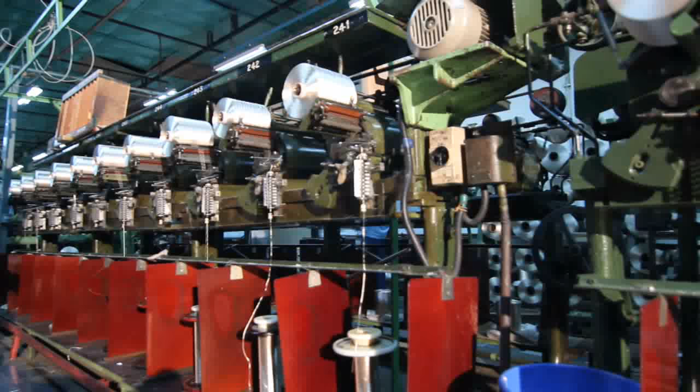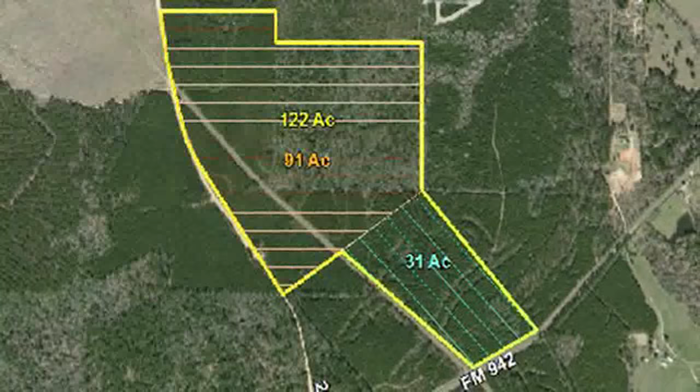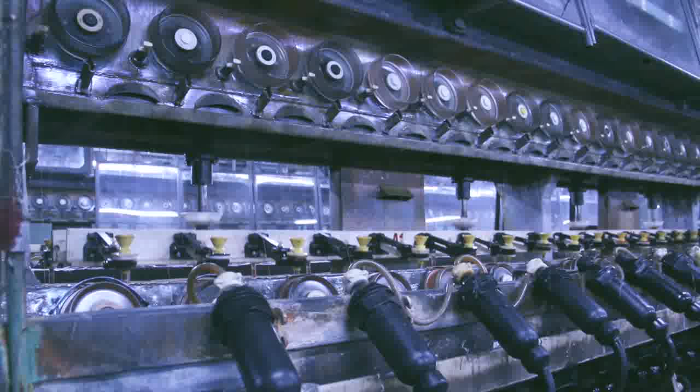It's Shri B.K. Birla. At a relatively young age of 27, in the year 1952, Shri Basant Kumar Birla, after having completed his studies, decided to venture into the viscose yarn making industry. He bought 122 acres of land in a remote, thickly forested area populated by tribals at a distance of 56 kilometers from Mumbai. In 4 years, with sheer hard work, determination and complete dedication, Basant Kumarji realized his dream, and in September 1956, the newly established Century Rayon plant commenced production of 5.5 tons per day of pot-spun viscose filament yarn. In the year 1963, the Tyre cord plant was initiated in collaboration with M/s AKU, Holland.

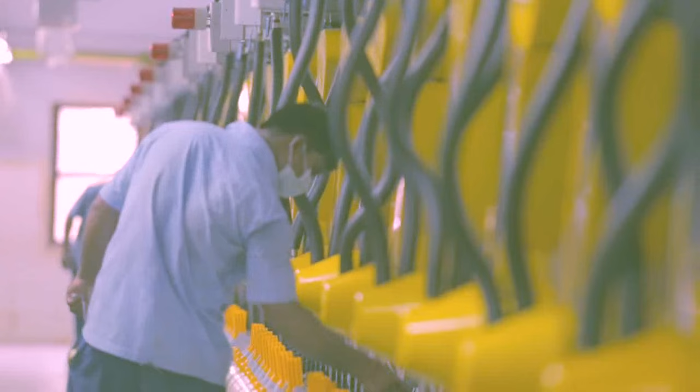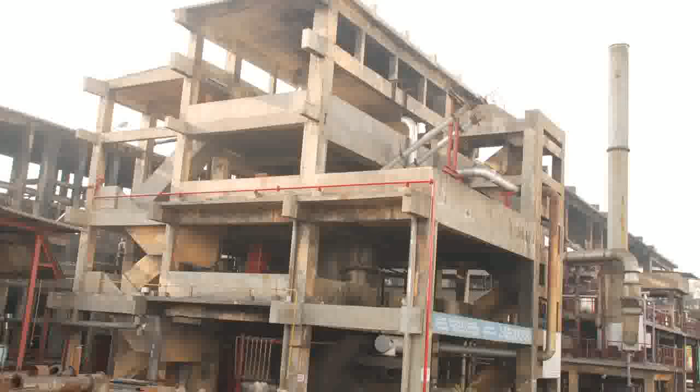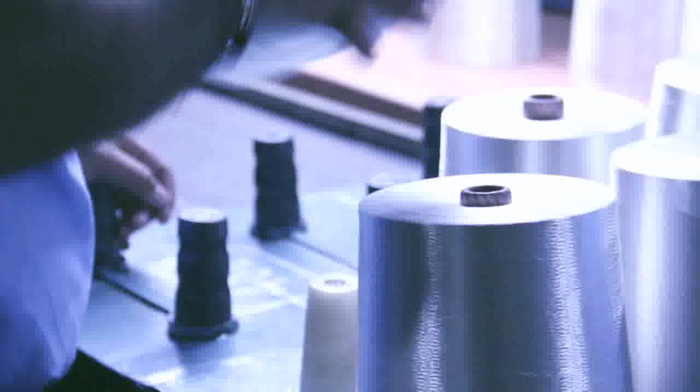Adding to the wings, a modern unit of continuous spun yarn commenced its operations in the year 1998. To meet the needs of various chemicals required in the rayon manufacturing process, the organization had backward integration into manufacturing of chemicals like caustic soda, sulfuric acid, and carbon disulfide. Century Rayon today produces about 46 tons per day of pot-spun yarn, 18 tons per day of high-tenacity rayon Tyre yarn, and 8 tons per day of continuous spun yarn.

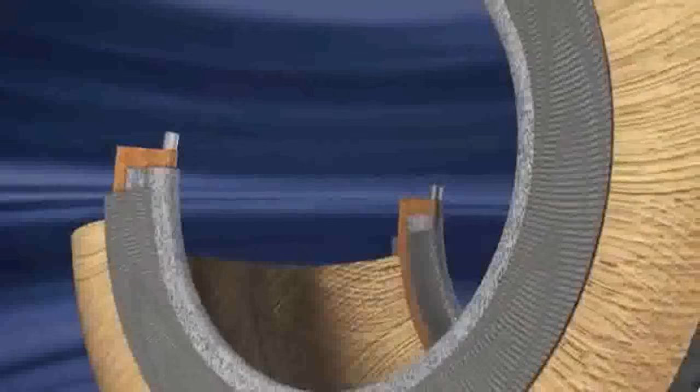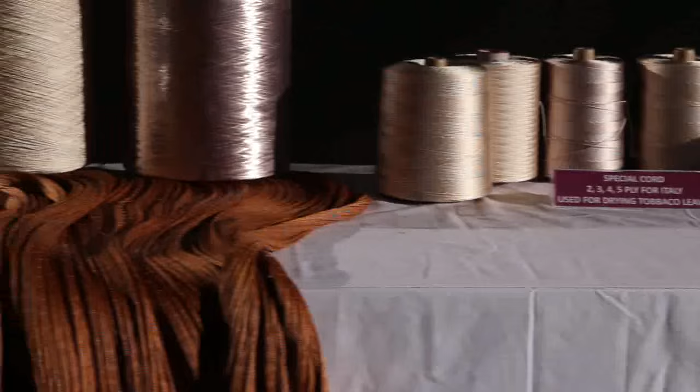Pot-spun yarn and continuous spun yarn enjoy a niche market segment in apparels, upholstery, designer suits, ladies and children's wear, while Tyre cord yarn finds application as reinforcement material for high-speed tires. Other applications include rubber hoses and specially treated fabric in space shuttles, etc. Century Rayon products are well accepted in both domestic and overseas markets due to their durability and consistency.

Today, Century Rayon employs a strong workforce of about 4,300 workmen and about 500 staff and officers. The largest contribution of Century Rayon, apart from its manufacturing plants, is not only being a major job provider to many households of Shahad and nearby vicinity, but also being a socially responsible company which runs schools, a college and a hospital, making it perhaps the only industrial group in Thane that has immensely contributed in the field of education and spiritual upliftment.

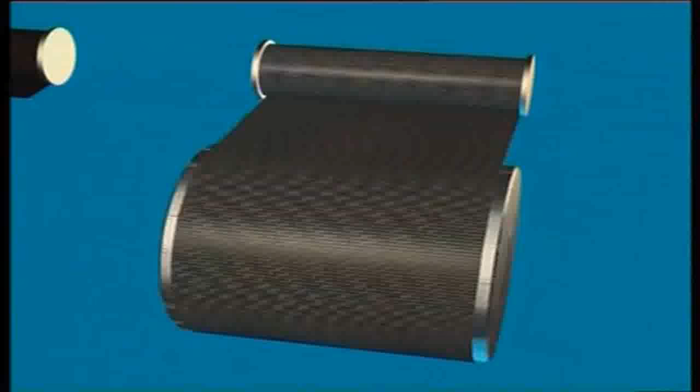The basic requirements of pleasant motoring are safety, even at high speeds, good road holding, prompt response to steering, zero vibration and a shock-free smooth ride. The Tyre plays a crucial and decisive role in meeting all these requirements. The quality of the Tyre and its behavior is largely determined by the reinforced material used.

Rayon is an excellent reinforcement material. It is used for ultra-performance tires and run-flat tires, as it meets all requirements such as good adhesion to rubber and plastic, good heat aging and chemical resistance, high modulus, low thermal shrinkage, and good dimensional stability.

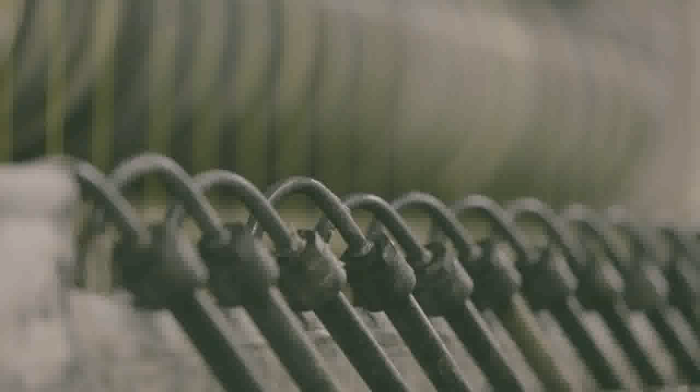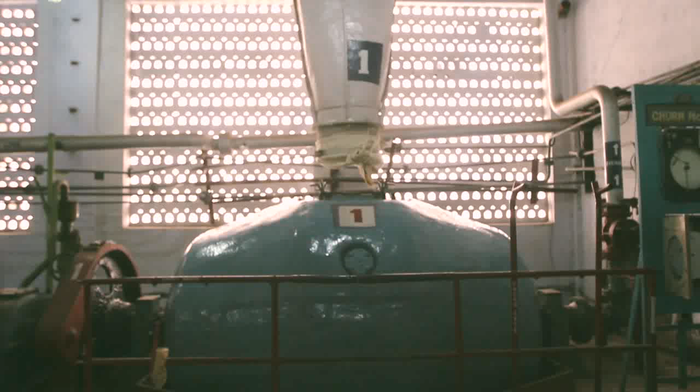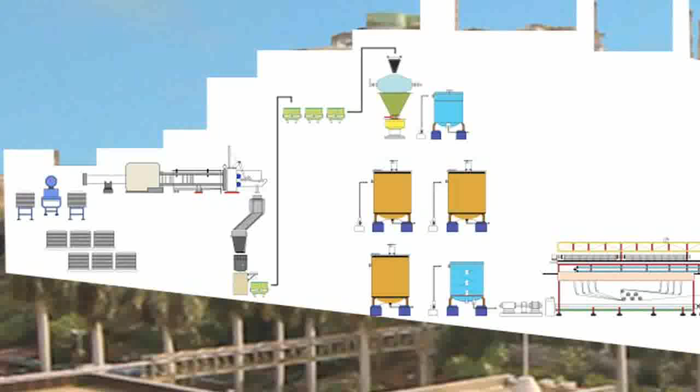Rayon is a regenerated cellulose fiber, which has its origin in purified wood pulp. This sounds a tad simpler than it is. The conversion of wood pulp to rayon yarn involves a series of complex chemical processes. The life of a passenger in a car is dependent on the performance of the Tyre. Now, we see the complete process of how Tyre cord yarn is made.

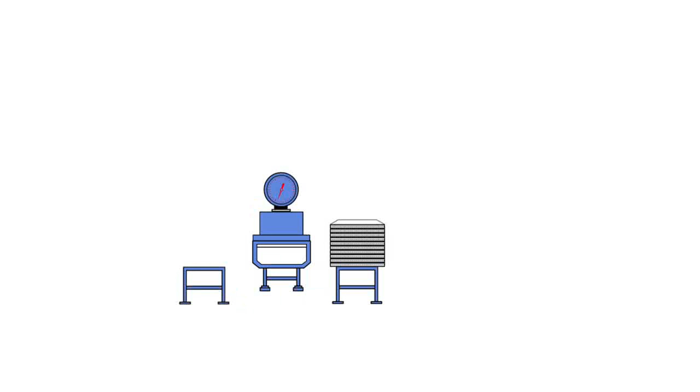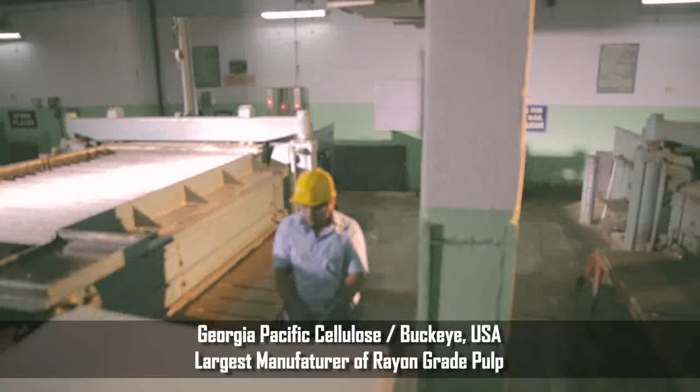At Century Rayon, only the best rayon grade pulp sheets are used. The sheets you see here are special wood pulp sheets imported from the USA. The pulp sheets are soaked with caustic solution and alkali cellulose is prepared. The alkali cellulose is then shredded into small crumbs in the shredder, and stored in bins in an aging room at a specified temperature.

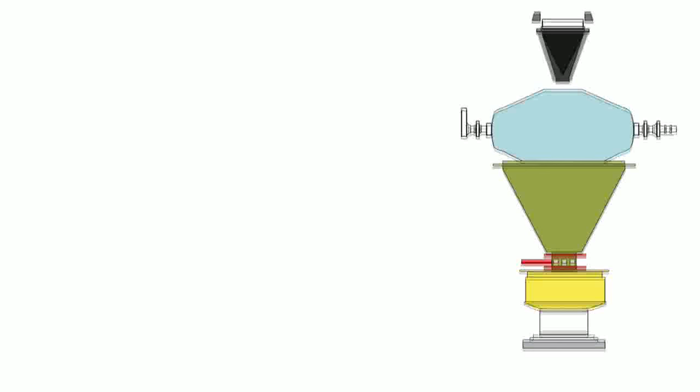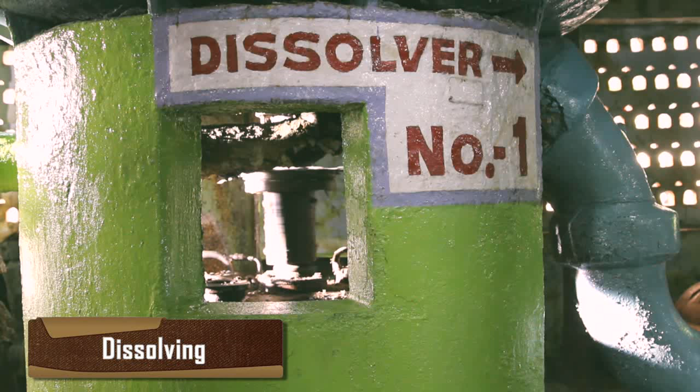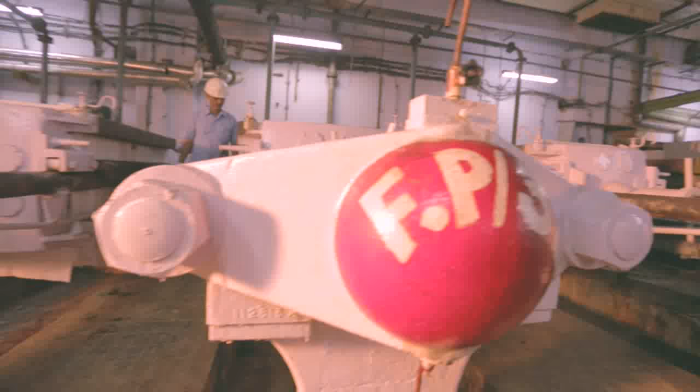This alkali cellulose is reacted with carbon disulfide to form sodium cellulose xanthate in a churn. The xanthate is then dissolved in a dilute caustic soda solution to form viscose. Viscose is then filtered and de-aerated to remove impurities and air. The ripened viscose, which appears like honey, is then supplied to spinning machines.

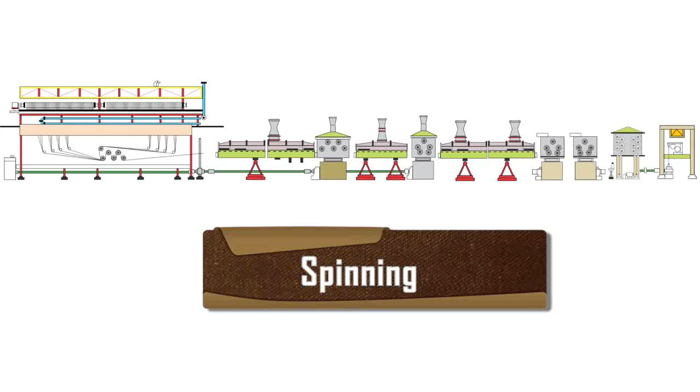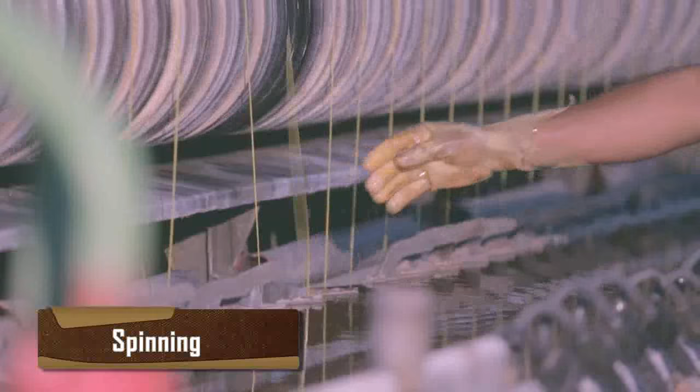The next process is called spinning, where viscose reacts with an acidic solution at controlled conditions and regenerates in the form of yarn, which is nothing but cellulose. Yarn is regenerated in two stages: on the spinning machines and in the stretch trough.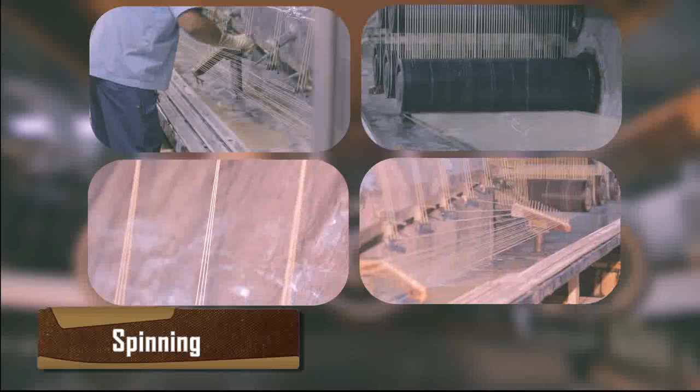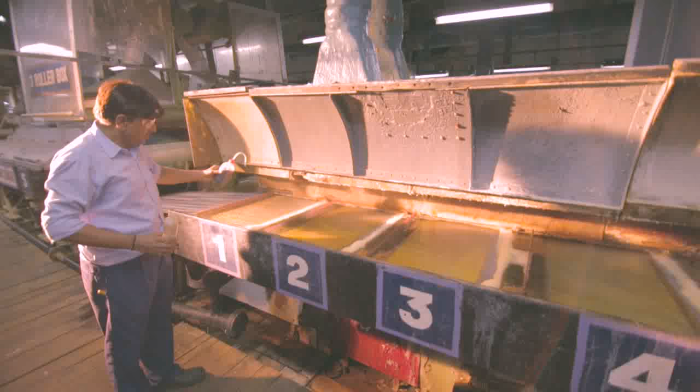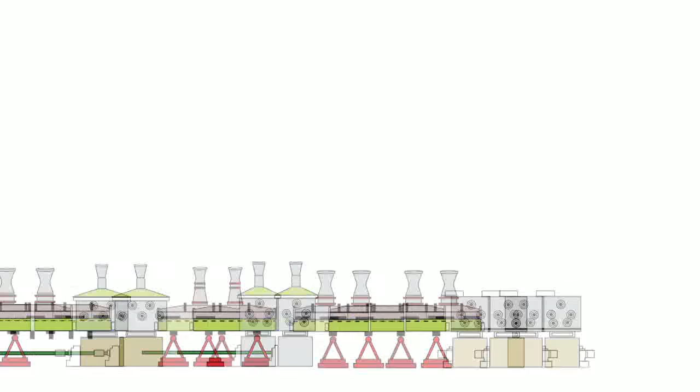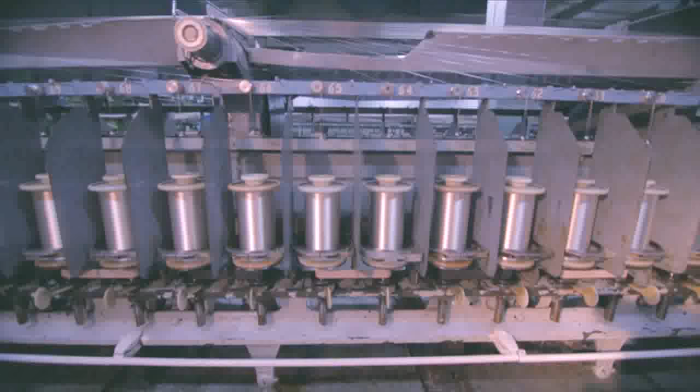Finally, it is washed free of acid, treated with finishing solution and dried. This dried yarn is then directly wound on paper tubes, that is zero-twist yarn, or wound over flanged bobbins, that is pre-twisted yarn.

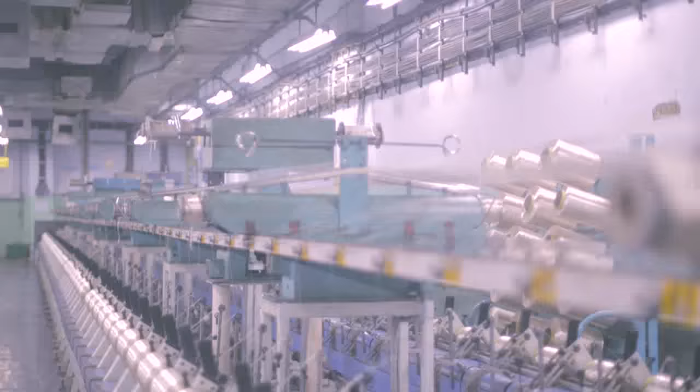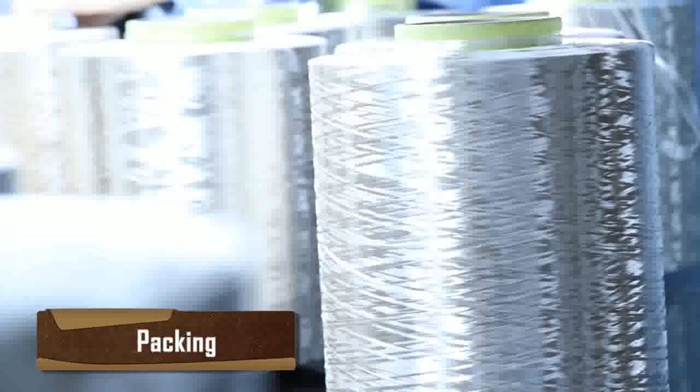Each and every package of Tyre yarn, that is the zero-twist yarn or the pre-twisted yarn, is inspected and segregated as per the laid down norms. This is how Tyre yarn is made and packed.

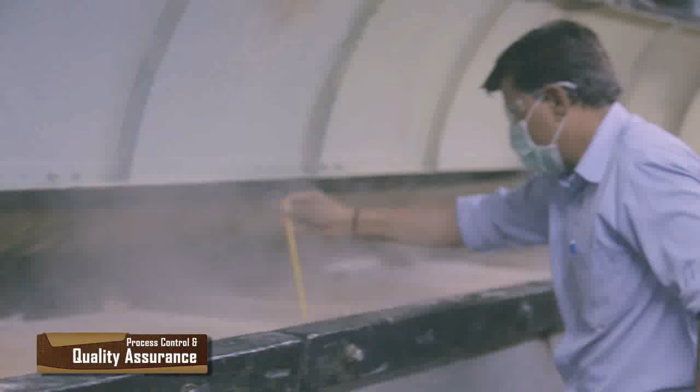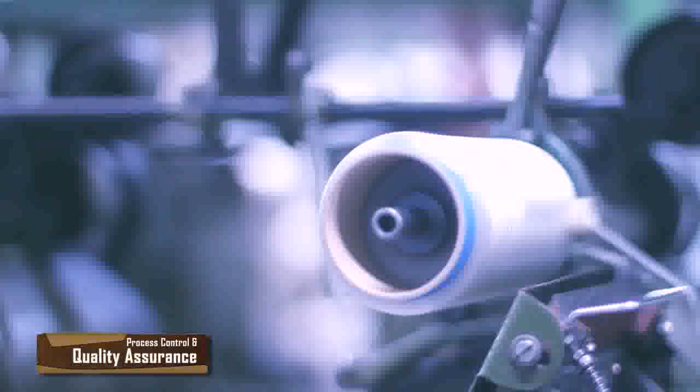Century Rayon has excellent systems when it comes to traceability. Each final product package carries a unique identification number. The system helps in tracking the final product from coning to spinning to the batch prepared in viscose.

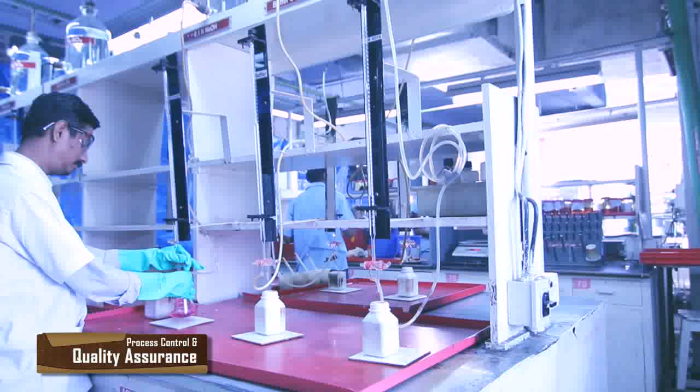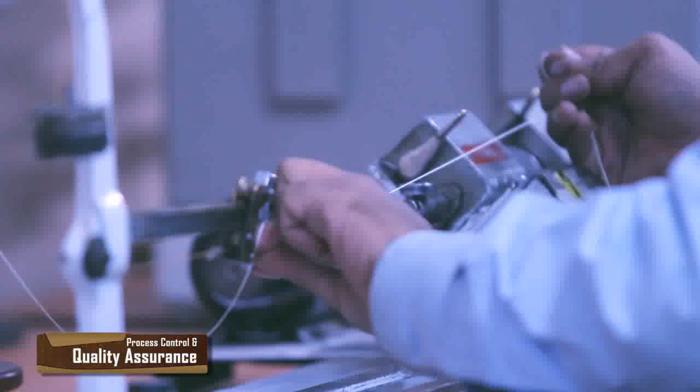We also have a system of analyzing and controlling the manufacturing through timely measurements in two state-of-the-art laboratories, that is, the chemical laboratory and the textile laboratory. Even during processing, all the critical quality and performance attributes are monitored with the aim of ensuring final product quality.

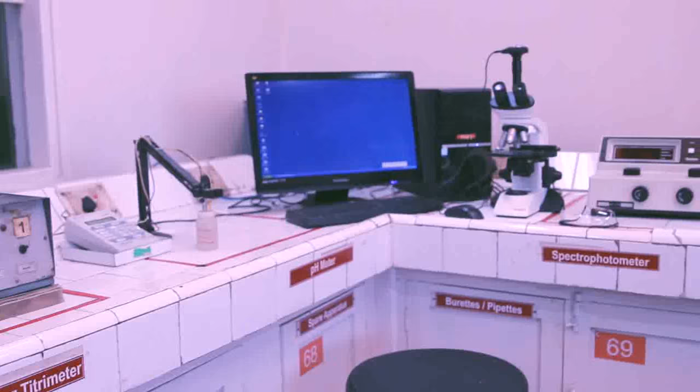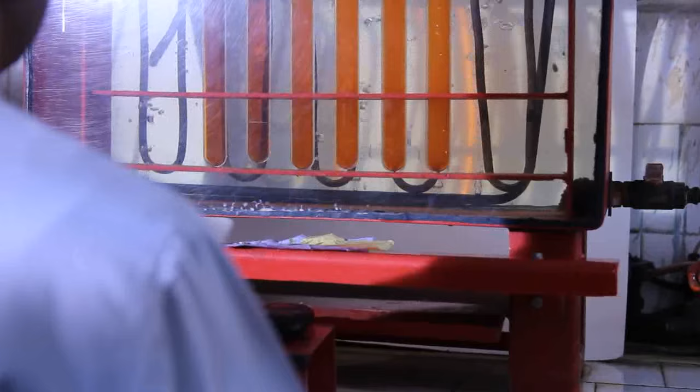Various control systems are placed as charts, SCADA, check sheets, and round-the-clock analysis of in-process materials and products ensure the quality of product. Efficiency and effectiveness of various equipments are ascertained by adopting preventive and predictive maintenance and periodical calibration of instruments.

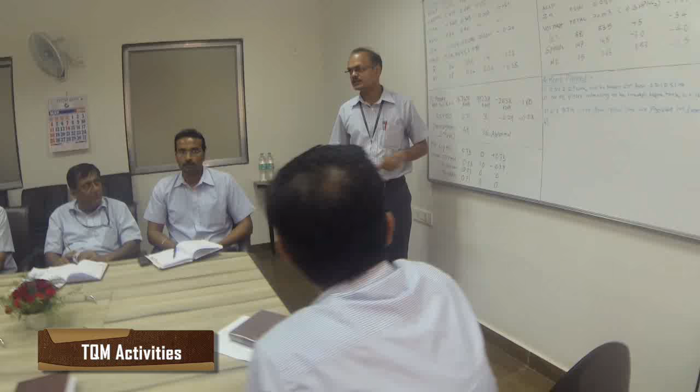Quality of product, services, and customer focus are the key requirements to sustain in business. Century Rayon adopted TQM, that is, Total Quality Management, as its core philosophy in the year 1993. Under the umbrella of TQM, various activities like COPQs, QIOs, 5S, Suggestion Scheme, Quality Circles continue to bloom.

5S, Suggestion Schemes and Quality Circles ensure involvement of workmen in TQM activities. Selected teams have participated and won recognition at state and national level competitions.

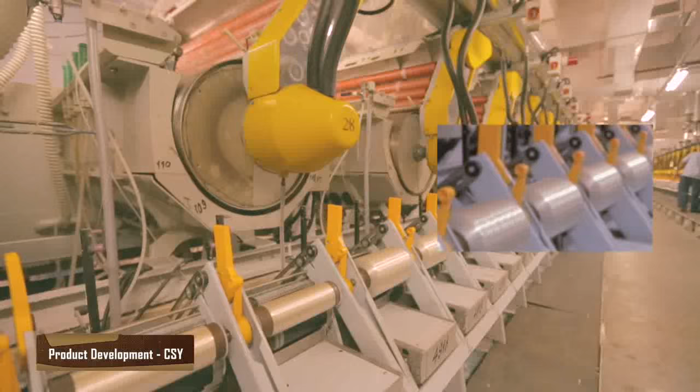The company has created an end-to-end and systematic innovation management process that encourages the generation of new ideas. With deep understanding of consumer needs and continuous effort, it has evolved a number of new products which are well accepted in the market.

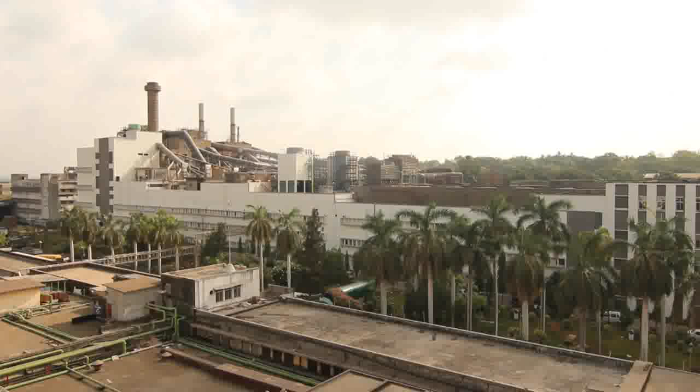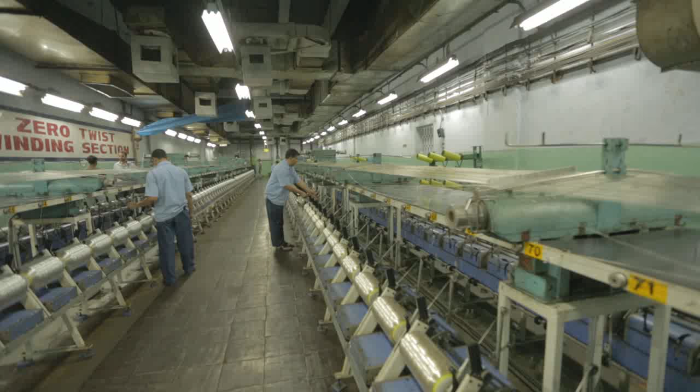The company today prides itself in being a star-rated and accredited quality management system. Besides, all the plants of the company, including the chemical units, have since been accredited with the Environmental Management System and the Occupational Health and Safety Management System.

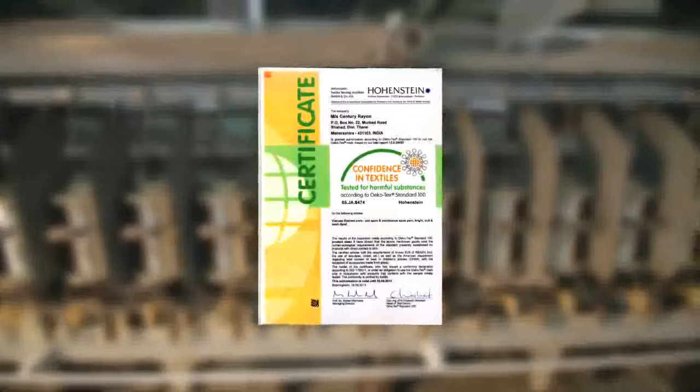Besides these quality certification standards, the company, in keeping with its pursuit for excellence, also has got REACH compliance and is authorized to use Oeko-Tex Responsible Care Standard marks in its products of pot spun and continuous spun yarn. The company has always stood by its obligations to the state in meeting all statutory requirements as far as running a clean and responsible industrial complex is concerned.

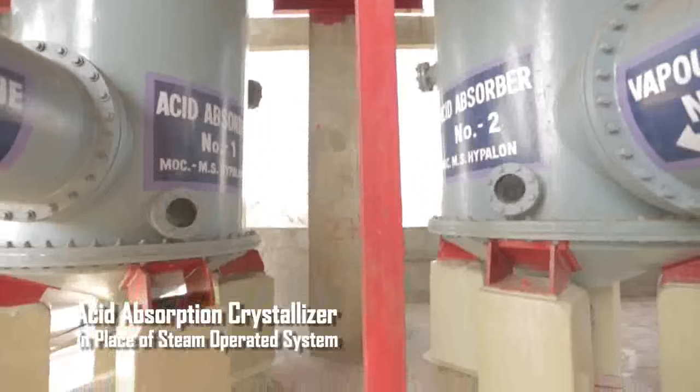Century Rayon is totally committed to spreading the message of energy conservation, not only through efforts at unit level, but also through educational institutes which form a part of our group.

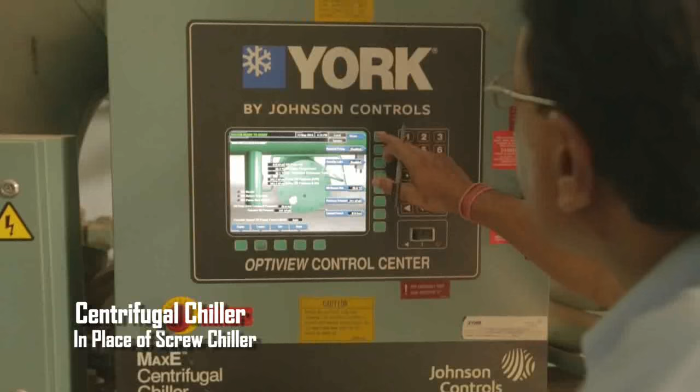Century Rayon is one of the designated consumers by Bureau of Energy Efficiency and thus has an obligation to reduce its power consumption every year by a specific percentage under the PAT scheme of Government of India. The organization has been able to do so over a period and has won many accolades from the state and central government agencies.

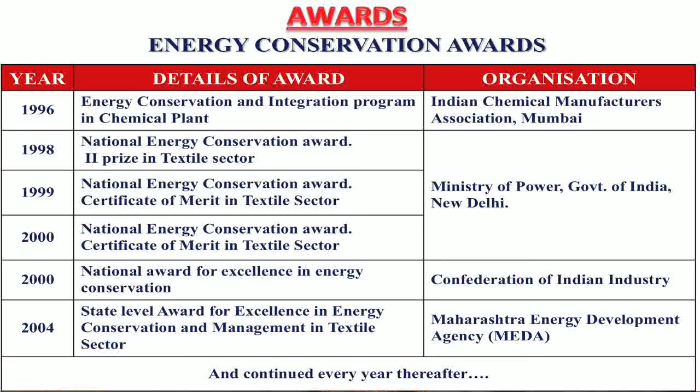Century Rayon is committed to a healthy flora and fauna in the region. All statutory requirements by various governing bodies and the Pollution Control Board are adhered to. Round-the-clock monitoring of gases in the atmosphere is carried out across various locations in the factory.

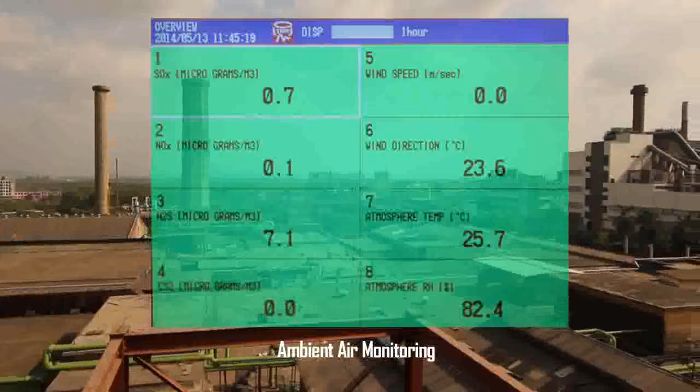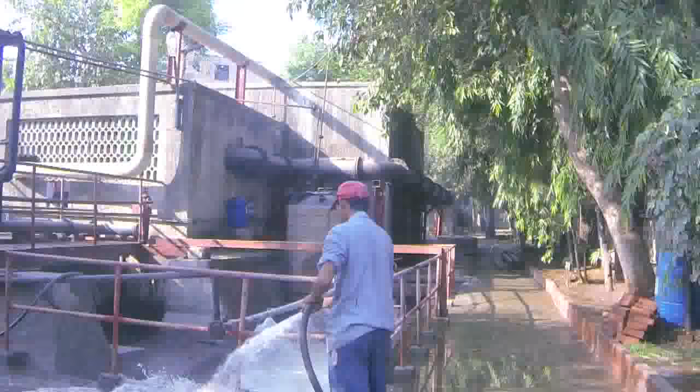The effluent from various sections of the plant are collected and treated in the effluent treatment plant and discharged at the norms specified by the Pollution Control Board. A part of this treated water is recycled for cleaning, gardening and other process uses.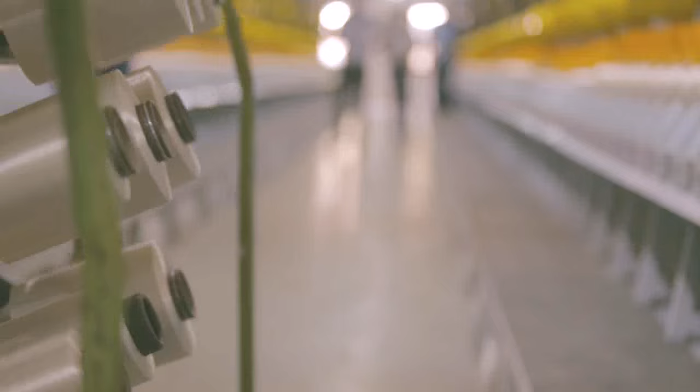Century Rayon Complex is synonymous with the name and fame of the Birlas, who have given a lot to society and the people of the region. As a well-oiled and running complex, Century Rayon is today the leading industrial unit in the region of Kalyan because of its broad business practices and unblemished ethics that go beyond the realms of practicing business in a competitive world.

The company, under the able leadership of its chairman, Shri B.K. Birla, today continues to keep its vision focused on excellence in these challenging times.

Century Rayon, one-stop destination for all rayon needs.